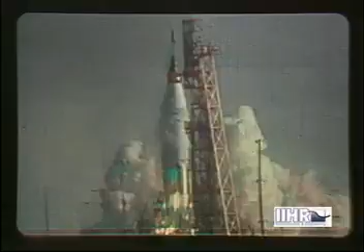Now, the effects of gravity, or weight, are several. As an unbalanced force, it will produce acceleration. As a balanced force, it will only produce stress in the object upon which it acts. Except for such stress, the object might then just as well be weightless, like bodies in space. Quite similar to the zero gravity of outer space is the neutral buoyancy experienced when swimming underwater.

If we combine the expression for the force per unit volume due to pressure gradient with that for the force per unit volume due to gravity, which involves the specific weight or fluid weight per unit volume, gamma, a simple expression for any component of the two together will result. This can then be equated to the product of the density and the corresponding component of acceleration.

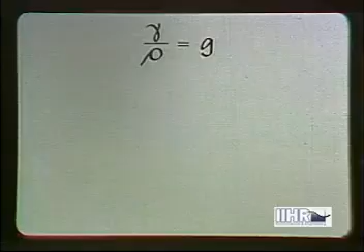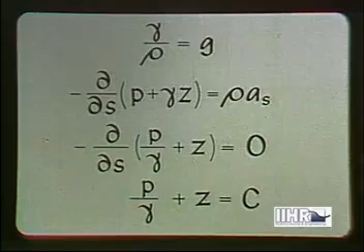If it is noted that the ratio of gamma to rho is the gravitational acceleration g, division of all terms of the foregoing equation by gamma will show that the sum of pressure head and elevation must change at a rate proportional to the relative acceleration in that direction. In a direction in which there is no acceleration, the sum must be constant. This condition is known as hydrostatic pressure distribution.

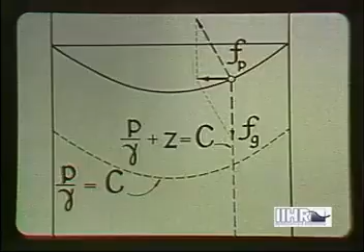In a cylindrical tank of water that is rotating with a constant angular speed, for example, the pressure distribution is non-hydrostatic radially because of the centripetal acceleration, but hydrostatic vertically because there is no vertical acceleration.

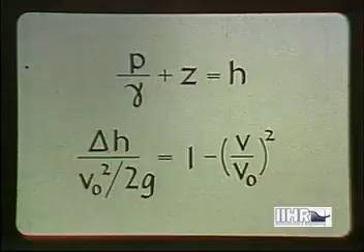Now, if the sum of pressure head and elevation is replaced by the piezometric head h, then the dimensionless pressure-velocity relationship for non-gravitational flow will be found to have as its gravitational counterpart an almost identical expression. That is, the pressure distribution curves for flow without gravitational action are identical to those for the variation of h with flow through the same boundaries in a gravitational field.

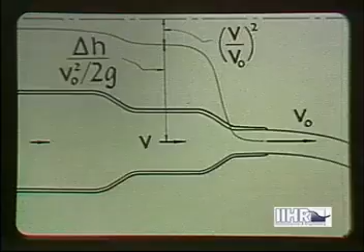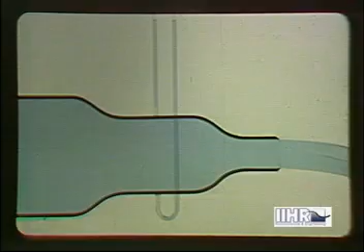Since h represents the height to which liquid will rise in a glass manometer connected to a piezometric opening, the constancy of the liquid levels in the manometers shows the lack of dependence of the piezometric head upon the orientation of this flow passage. In confined flow, therefore, fluid weight has no effect upon the flow pattern. Its sole influence is to increase the pressure head, P over gamma, in proportion to the decrease in elevation.

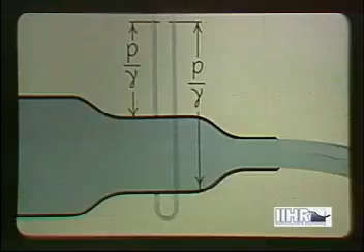The dimensional form of the pressure-velocity relationship has its gravitational counterpart in what is known as the Bernoulli equation, which states that the sum of velocity head, pressure head, and elevation must yield the same total head, capital H, at all points in steady irrotational flow.

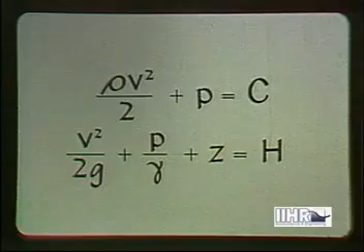Since the total head is the height to which liquid would rise in a manometer connected to a stagnation tube, the Bernoulli terms are especially suitable to graphical representation, for the velocity head is the distance between the horizontal line of total head and the line of piezometric head below. A gradual change in rate of flow causes the two sets of manometer columns to rise or fall proportionate distances.

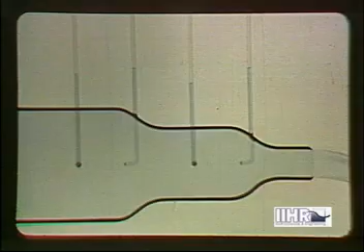Gravity exerts an accelerative effect upon fluid motion only when the flow in question has a locally inclined free surface. This is best illustrated by a liquid flowing in contact with the atmosphere, as in this vertical jet.

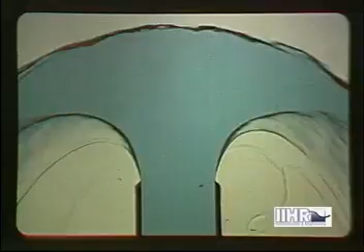Since the free surface is a line of zero pressure, the stagnation point coincides with the maximum level attainable, the line of total head, and the velocity head increases on either side of the stagnation point as the surface decreases in elevation. The velocity at points within the flow is related to that of free surface points by the flow net.

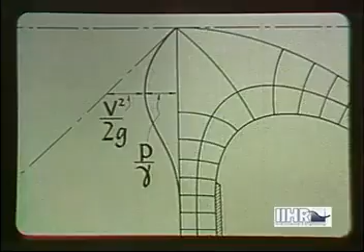The pressure at any internal point then follows from the Bernoulli equation. It is evident that an internal pressure must exist, for only the lateral pressure gradient is available to produce the required horizontal acceleration of each half of the flow.

If the pressure is zero, not only along the free surface, but throughout the moving liquid, as in this jet, then conditions correspond to those of free fall.

In the light of the Bernoulli equation, the sum of the velocity head and the centerline elevation of a liquid jet must be constant. In the light of the equations of physics, the horizontal velocity component must be constant, since there is no horizontal acceleration, and the square of the vertical component alone hence varies linearly with the elevation.

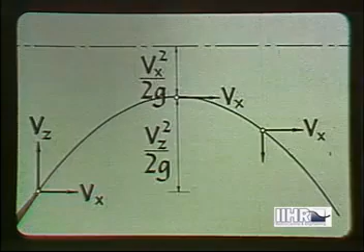Torricelli, a pupil of Galileo, reasoned from his master's laws of free fall that a vertical jet should rise practically as high as the free surface in the supply tank.

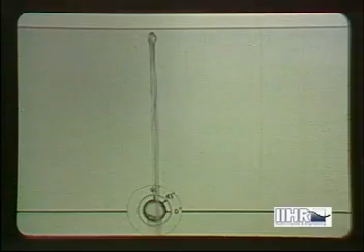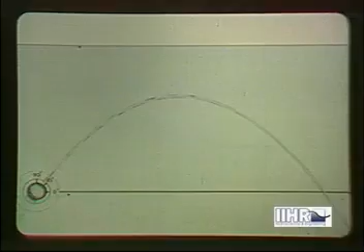Moreover, for an inclined jet, from the geometry of the parabola and the circle, he showed that the intercept of the initial tangent with a circle based at the point of tangency determines the location of the vertex and hence of all other points of the parabolic jet profile.

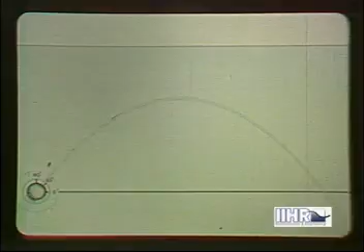Evidently, the maximum length of trajectory is attained at 45 degrees when horizontal and vertical components are initially equal.

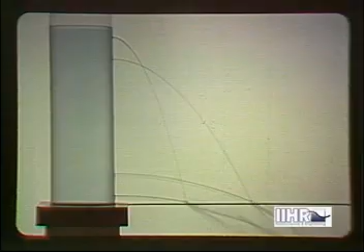It follows that jets from orifices in the side of a tank, equidistant from top and bottom, will intersect the bottom line at the same point, and hence that an orifice at mid-height will produce a jet with the greatest horizontal throw.

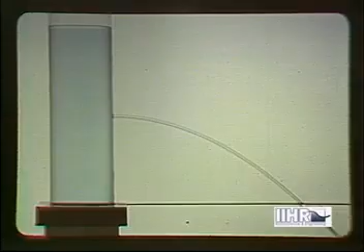High-velocity jets from fire nozzles fail to duplicate these parabolic trajectories because the intense turbulence generated in the hose causes the flow to break into spray. Further effects of turbulence will be illustrated in the next film of this series.

A jet shown in the second film to illustrate the free streamline principle was photographed in such a way as to eliminate the effect of gravity.

If a similar jet is now observed in a gravitational field, the relative influence of the fluid weight will become greater as the velocity head relative to the orifice dimension decreases. The square root of twice this ratio is the Froude number introduced in the first film.

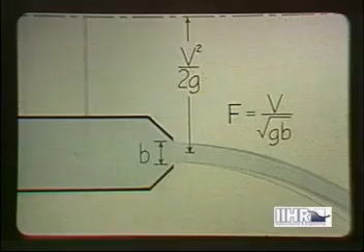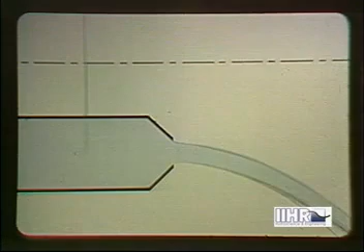Evidently, the lower the line of total head, or the smaller the Froude number, the greater will be the relative effect of gravity on the deflection of the free stream.

If the head decreases till the top half of the boundary becomes ineffective, the lower half will act as a weir over which the water will flow with a Froude number that is no longer independently variable, but depends upon the geometry of the flow boundaries.

If a weir is used for flow measurement, the lower as well as the upper surface of the nappe must be kept at atmospheric pressure by ventilation.

The rise in water level under the nappe is now purely a dynamic effect involved in the deflection of the stream by the floor. If, however, the ventilation tube is removed, the air under the nappe will gradually be carried away. As this occurs, the difference in pressure will cause the nappe to be depressed in accordance with the flow net and Bernoulli equation.

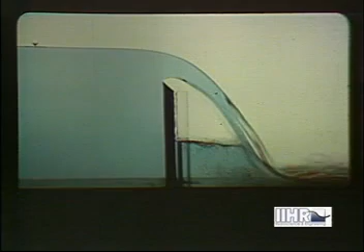In passing, it might be noted that large spillways are built according to the profile of the undersurface of a ventilated nappe, on the reasonable assumption that the resistance of the solid boundary will not appreciably change the distribution of velocity and pressure at the crest.

Although the Froude number of the ventilated weir is fixed by the geometry, it can be reduced towards zero if the downstream side is gradually submerged by the tailwater.

On the other hand, it can be increased far above unity if the flow is made to approach the weir with sufficient velocity to overshoot it, as is seen here at successively greater values of the Froude number.

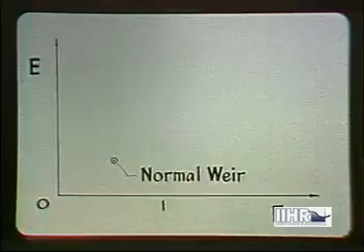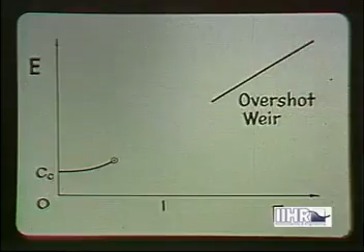However, in the plot of the Euler number, or discharge coefficient, against the Froude number, which shows these two distinct zones of operation, there will be a gap between them, in which flow at the assumed depth will be physically impossible. In other words, as the Froude number is reduced toward unity, the approach section will abruptly become submerged by backwater.

Further perspective in the matter is obtained by considering flow that is nearly enough uniform for the one-dimensional approximation to apply.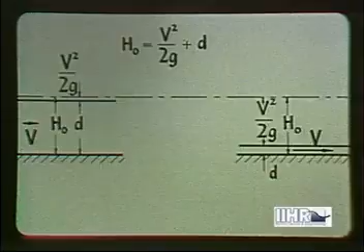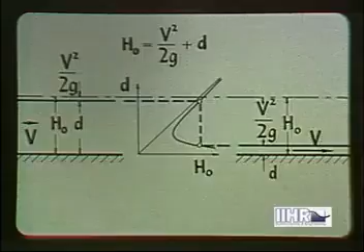The total head relative to the channel bottom is the so-called specific head, or sum of depth and velocity head. For constant discharge, this sum will vary according to the two-branched curve known as the specific head diagram, which shows that for a given discharge and specific head, two different depths are possible.

The flow can pass between them by going over a bottom rise of just the right height to produce the minimum specific head or critical depth at its crest. Critical conditions correspond to a Froude number of unity.

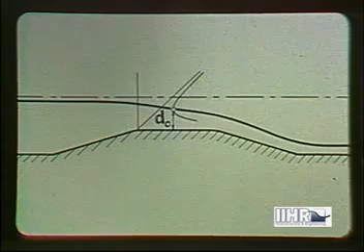Flows with subcritical velocities, depths greater than the critical, thus correspond to Froude numbers less than unity, and vice versa. The flow downstream can hence be either supercritical or subcritical without affecting that upstream.

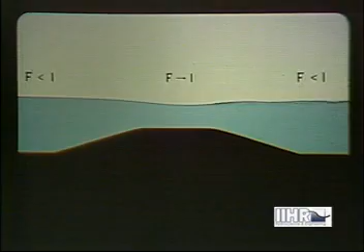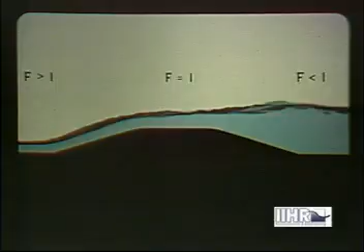Evidently, it is also possible to pass from the supercritical to the subcritical at that particular discharge, producing critical flow at the crest, or once again to the supercritical on the downstream side.

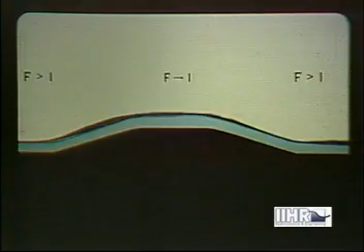As in the case of the sharp-crested weir, there is an intermediate range in which flow is physically impossible. Thus, if the discharge rate is further decreased, a backwater effect will drown the flow upstream.

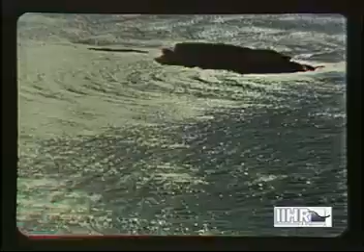Wave motion is that phase of flow in a gravitational field which has not only received the most attention over the greatest number of years, but which has also succumbed most completely to mathematical analysis.

Now, waves in general are both unsteady and non-uniform, like those seen here. But we shall deal only with the types that can be made to appear steady by the principle of relative motion.

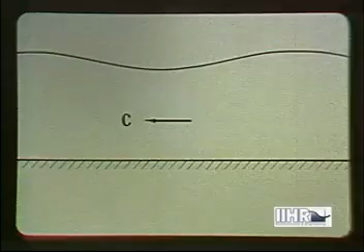This means that the wave profile must move relatively to the fluid itself with a constant speed, known as the celerity c, and hence without change in form. The celerity of a wave depends, in addition to gravity, upon three factors: the depth d of the fluid stratum over which it moves, the wavelength lambda, and the wave amplitude a.

If the wavelength is large compared to the depth, its effect is negligible, and it is the depth that controls the celerity, as in the case of tides.

If, on the contrary, the depth is large compared to the wavelength, it is the wavelength that controls the celerity, as in storm waves in the ocean.

Increasing the amplitude of a wave causes its celerity to increase in either case. This effect is limited, however, for a wave crest curves more and more rapidly with increasing amplitude and eventually peaks and breaks.

In any case, as seen from the paths of these suspended particles, the celerity of the profile and the locally induced velocity of the water are quite different.

Oscillatory waves are readily generated by the harmonic displacement of a wall. They can be of either the shallow water or deep water type, depending upon the ratio of wavelength to depth.

If a train of oscillatory waves is reflected by a stationary wall, as at the left, the result is a series of standing waves, the profiles of which have no longitudinal but only vertical motion. Standing waves of great length are often formed in harbors.

Generation of what is known as a solitary wave requires the displacement of the wall a finite distance in the positive or negative sense. The resulting wave rapidly assumes a stable form and can be reflected repeatedly between the end walls of the channel.

What is called a surge entails an abrupt change from one depth to another and requires the continuous displacement of the generating wall in one direction. The same phenomenon results from the abrupt adjustment of a gate in a uniform flow.

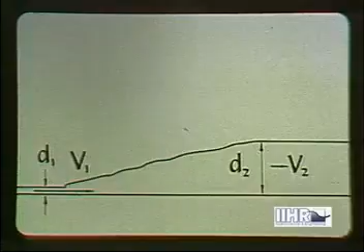Since the flow is essentially uniform before and after the breaking front, the relationship between the celerity and the change in depth can readily be evaluated through use of the simplified continuity and impulse momentum relationships for one-dimensional flow, with this result. The jump is seen to take place between the supercritical and subcritical regimes without benefit of channel constriction.

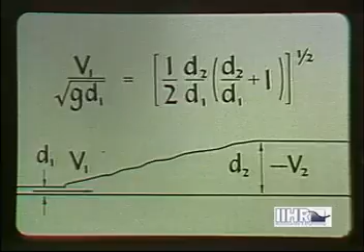The equation for the surge celerity, which now equals the velocity of the oncoming flow, can be written in terms of the Froude number. Evidently, F equals 1 when D2 equals D1.

Through additional use of the work-energy relationship, it will be found that a considerable loss in total head must take place if the other two equations are to be satisfied. This results from the generation of turbulence at the breaking front, the energy of which is rapidly dissipated through viscous shear, as will be described in the next film of the series.

You have just seen examples of various flows in which gravity is commonly considered to play an essential role. In the numerical analysis of such problems, G, the fluid weight per unit mass, is treated as a constant because the flows presumably take place under almost identical gravitational conditions.

Moreover, the free surface involved is usually that of water under air, the simultaneous motion of the air being ignored because of its much lower density.

Now, similar conditions would obtain between two fluids of more nearly the same density, such as cold water under warm water, or even cold air under warm air.

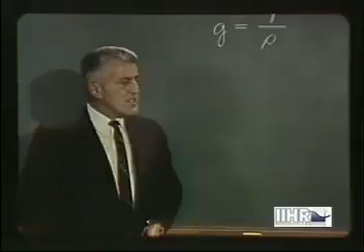For example, these two reservoirs contain water under air and salt water under fresh water. If the combined unit is displaced, then much the same wave motion is seen to take place at both interfaces, except that the brine-water combination seems to follow a totally different time scale.

What was actually different between the two flows was the effective acceleration of gravity, which we will call G prime.

G prime is seen to be proportional to the relative difference in density, or more significantly, to be equal to the differential weight per unit mass.

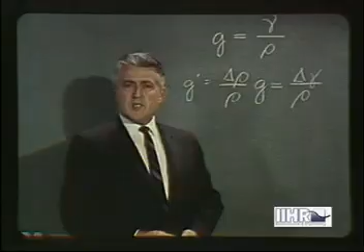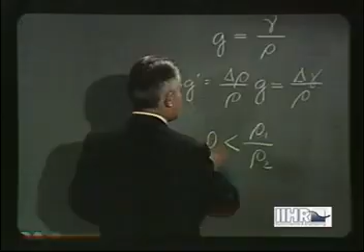Now, if due account is taken of the fact that both fluids are involved in the acceleration, then much the same procedure can be used in the analysis of flows in which the ratio of fluid densities, rho 1 over rho 2, varies between the limits of nearly 0 for air and water, and nearly unity for similar fluids of almost the same composition or temperature.

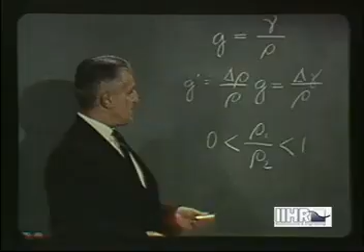The remaining scenes of this film will be used to show with layers of air and water and brine many of the occurrences already seen, apparently in slow motion.

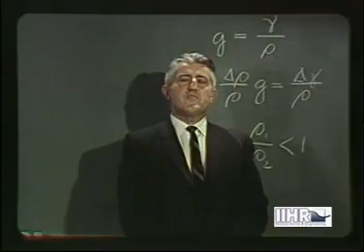These same phenomena are commonly encountered at natural scale in the atmosphere and in the oceans, lakes, and rivers of the Earth. The flow of cold, foggy air over the high point of a mountain pass into a warmer zone

is modeled in a laboratory flume by the discharge of a silt-laden stratum from a reservoir. A fair reproduction of the hydraulic jump that normally forms below a spillway is seen downstream.

The abrupt front of a gravity underflow typifies not only the so-called dam break wave, but also the saline tidal wedge in an estuary, or even a dust storm, or an atmospheric cold front.

Not only does it behave at a constriction like water under air, but it forms a surge traveling back upon itself when reflected by a barrier.

A wave at the interface between two such strata, however, will affect them in reciprocal fashion without disturbing the upper surface. The wave celerity, obviously, is then greatly reduced.

Wave resistance, such as that encountered by ships, will receive further attention in the final film of this series.